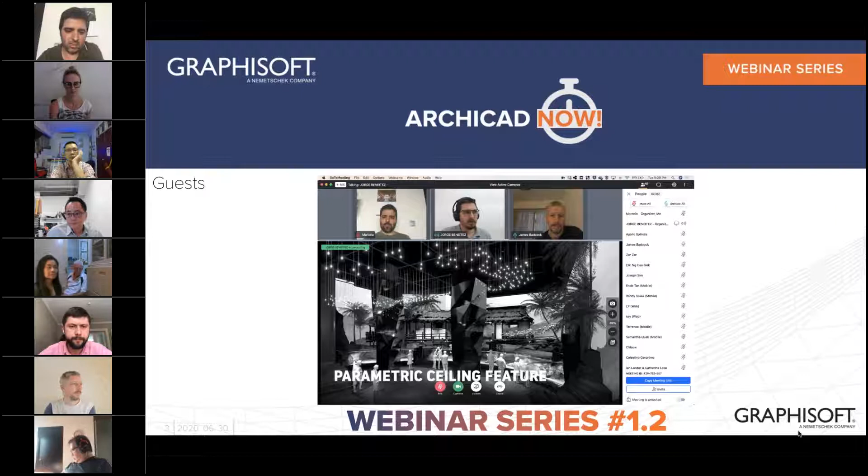Let's jump into this session about building up library objects by importing either native objects that are available online, or external geometry that is also available online. You can get it, and then we manipulate it and enrich it with specifications and properties. So let's jump into ArchiCAD with this.

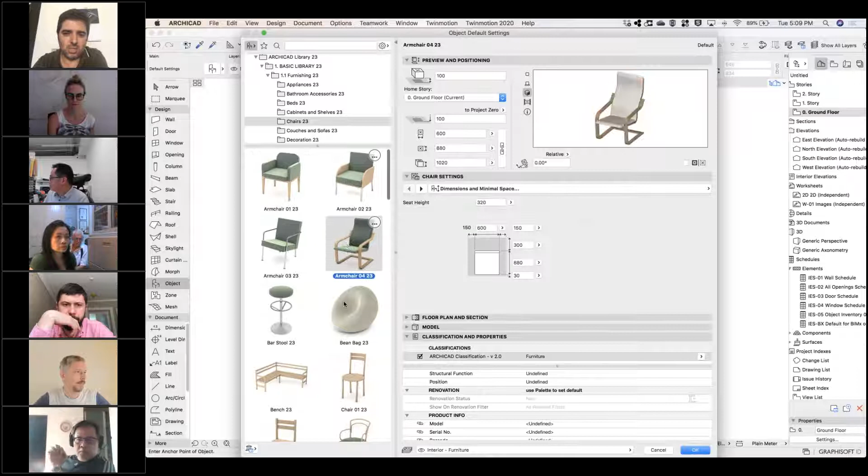So how does this work? Basically, under ArchiCAD, under the objects, we can look for basic library elements of furniture - some beds, some chairs. When we look at the chairs, we can go through some parameters, some properties that it has, and we can even choose different types of designs. So some objects have more properties that we can choose from.

For example, if I choose this designer chair, there are several different designs that we can choose here, and for some of them we can even choose to take out the armrest. These are parametric objects, and they're good because we can very easily turn the parameters on and off here.

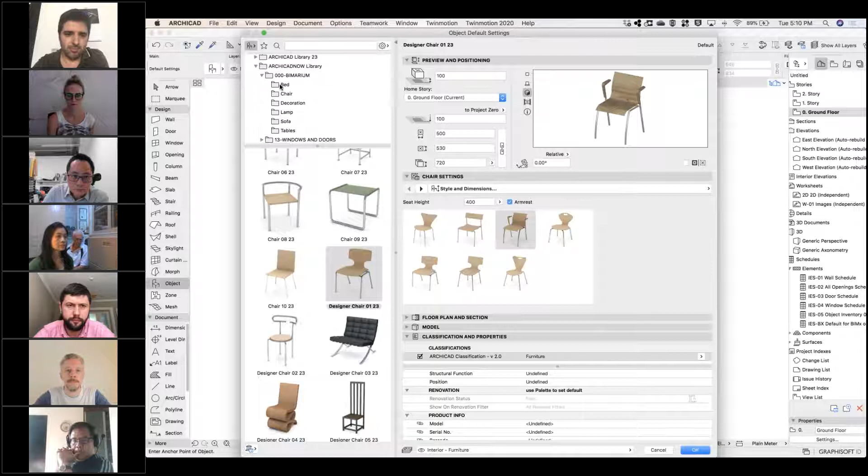Another thing that we can do is load libraries of objects that we get online. In this case, I went to a website called Bimarium and got objects - you see this one, for example, comes from IKEA. We can choose the parameters, we can choose the building material that they have, so there's some level of freedom in terms of choosing properties.

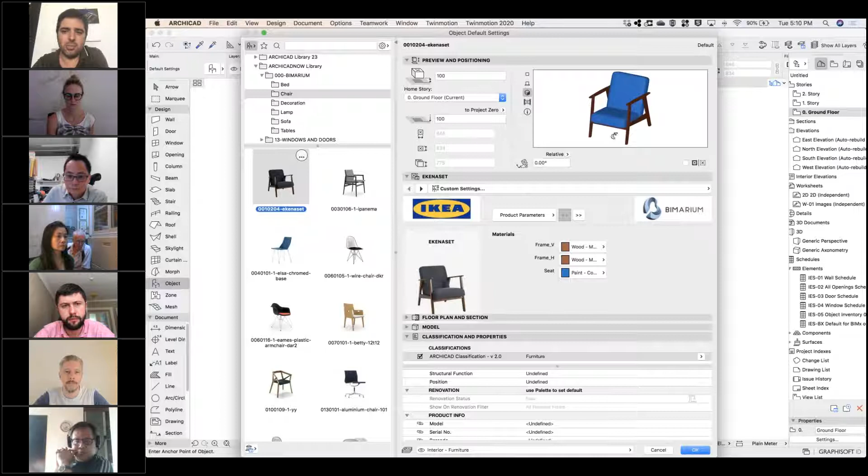Because this is an existing object, it doesn't make sense for us to manipulate the geometry - changing the height, the width, the length. So you see these properties are hard-coded and locked: the chair is 775 millimeters height, and so on.

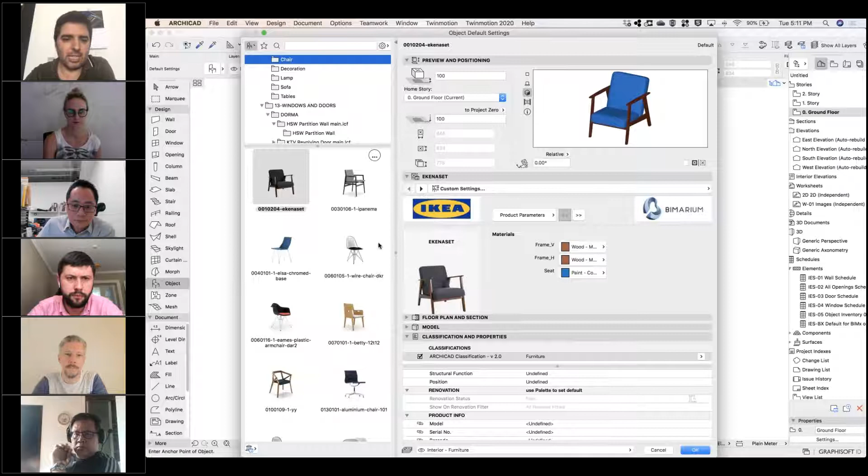This can also be used for other elements like windows and doors. I'll show you where we can get this kind of information. Even if we want to look for material for a certain object - let's say I'm looking for a skylight - I just type skylight here under the search function of the objects, and I can scroll down and see each one, noting that 23 are in my loaded library.

Every other one is from bimcomponents.com - you see it has these 3 dots here, so I can just go to the BIM Components portal. This opens BIM Components, which is powered by Graphisoft. We can go here and download it, drag it into ArchiCAD, and use it directly in ArchiCAD.

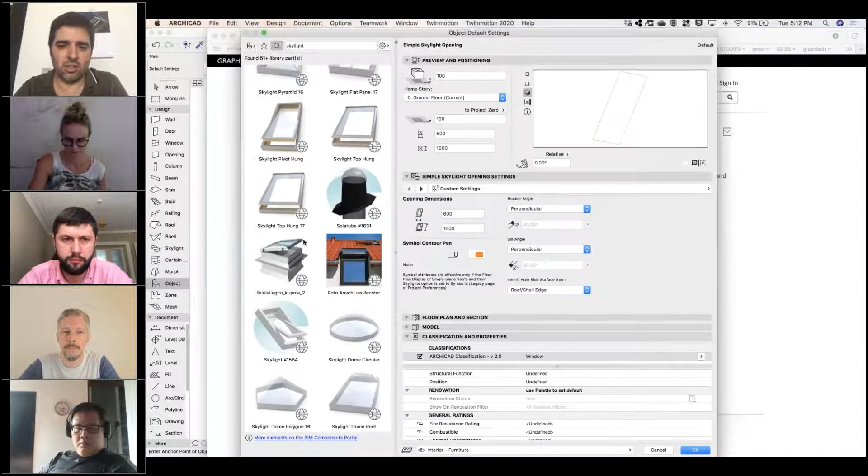But there are other websites where you can gather this information, so this is what I'll show you now. For example, as I mentioned, Bimarium - later on I will have Stefan, who is the founder of Bimarium, explain a little bit about this.

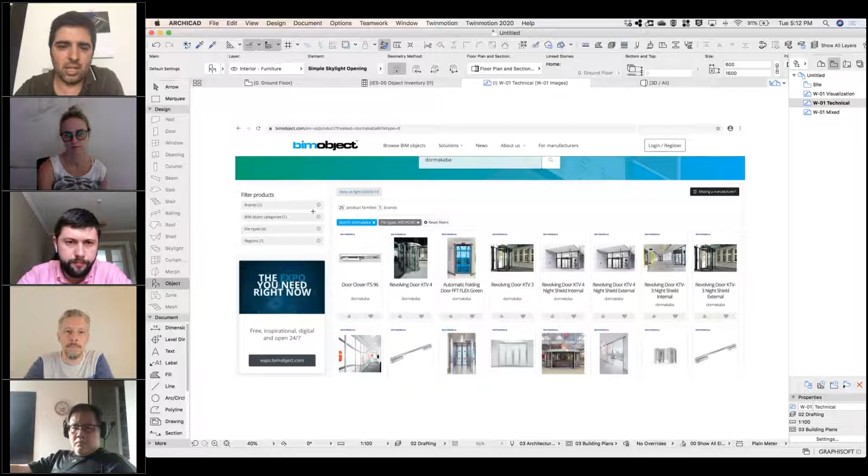We can use bimobject.com, and we can use some geometry websites like 3D Warehouse. We have objects that are more focused in visualization, like this bimarium.com example, and more technical websites like bimobject.com.

So if you want a specific revolving door that you know a certain manufacturer has, for example this Dormakaba revolving door KTV4, you can download and use it in your project. It already comes with the specs and details about the real object.

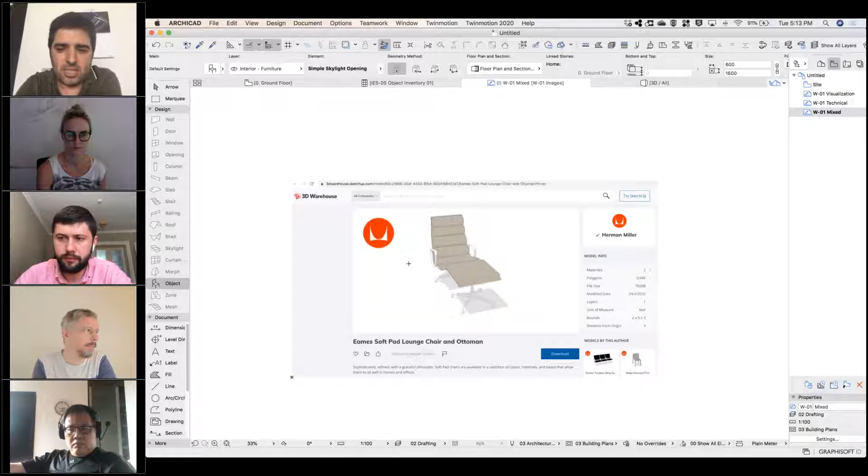But we can end up in a mixed situation where you found a reasonably detailed object that looks like how you want to use it in ArchiCAD. So I went to this 3D Warehouse, this SketchUp warehouse, and I want to download it.

I just Googled SketchUp Eames SoftPad Lounge Chair, and this is where it brought me. I can just sign up and download this object, and then let's see how we can use it.

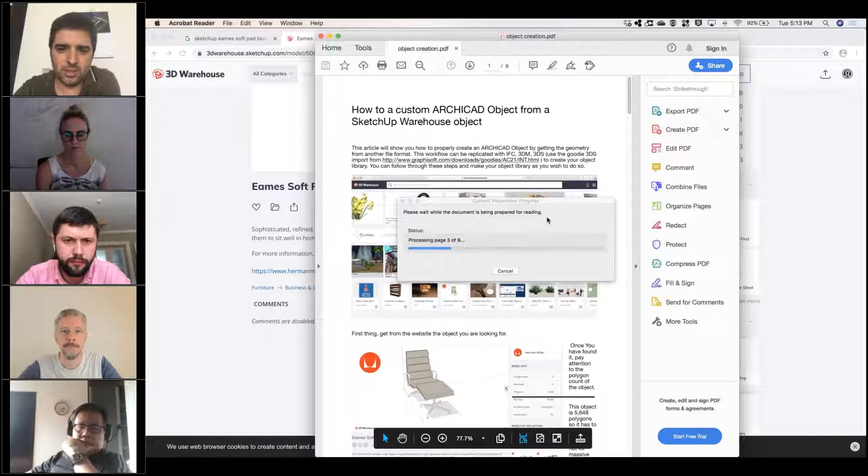So let's dig into this and see how we can do this. Let's say this is my project area, and I already have an object here. So under ArchiCAD now, I already have this Ottoman chair object. I'll just drag and drop it inside ArchiCAD to place this chair.

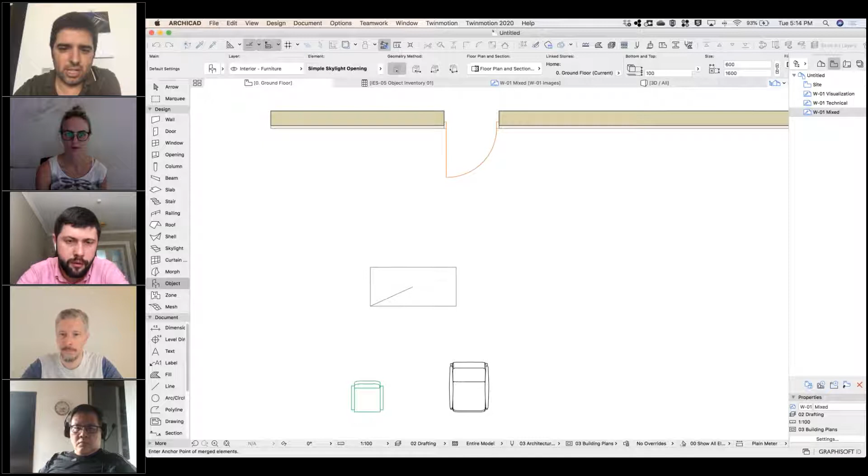And what it does is it starts converting it. You see, okay, the geometry is here. I'll just select it and show it to you. So we have the object placed.

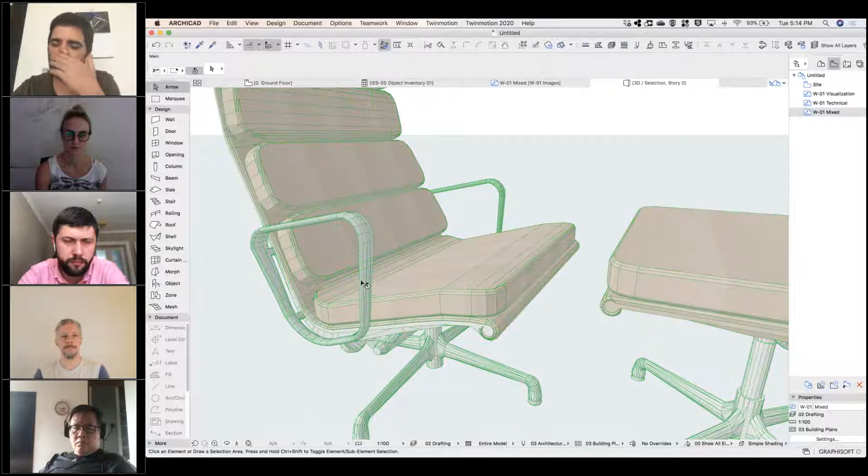It's a bit fussy. You can see that we have all these triangulations that come from the object, so it makes a face out of every face that the element has here, and we can see the ridges here.

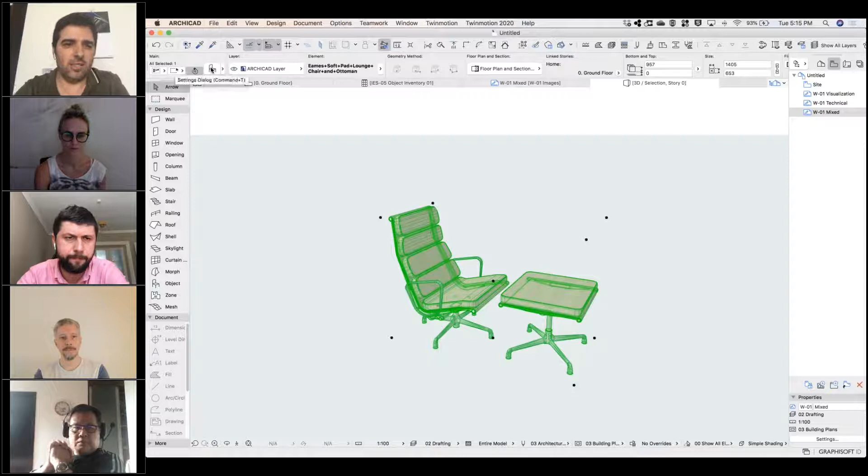So when I select this element here, you can see that it's an object, and I can click and go to the settings and see that this was an object that, just by importing directly into ArchiCAD, it goes into the embedded library.

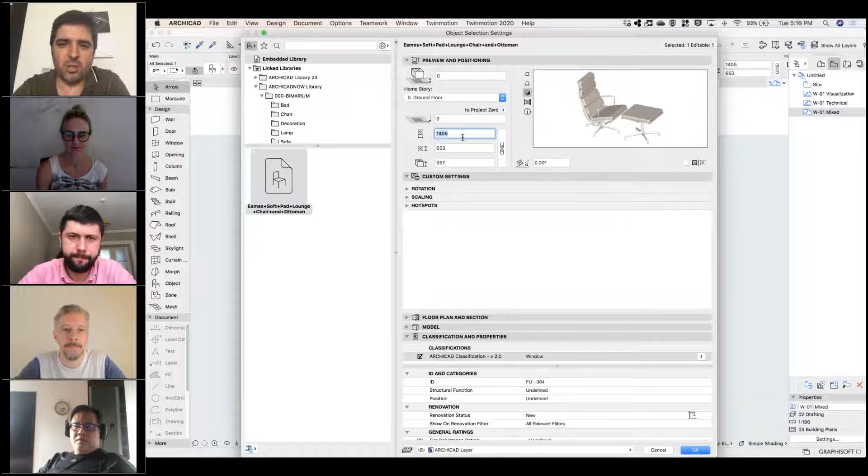We'll have some hotspots that are automatically created in the corners. We can choose to edit the color of the representation in the floor plan of the lines, and we can also override all the materials of the object.

So you see here, it becomes overridden with brick now. So basically, what we can do to make this a more usable object is the following.

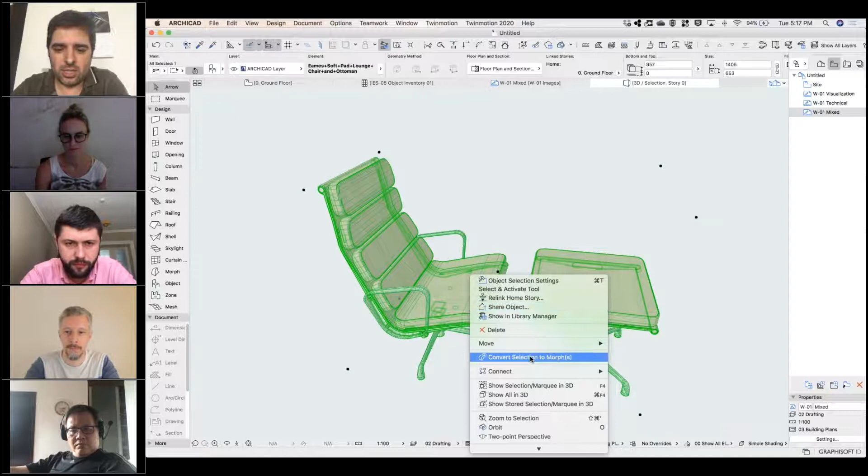First, we're going to select the object and convert it into a morph. By doing this conversion to morph, you will make this object editable, but with editable parts.

So you see here, I have my groups active. Let me see, I think I can move this. Where am I going to put this?

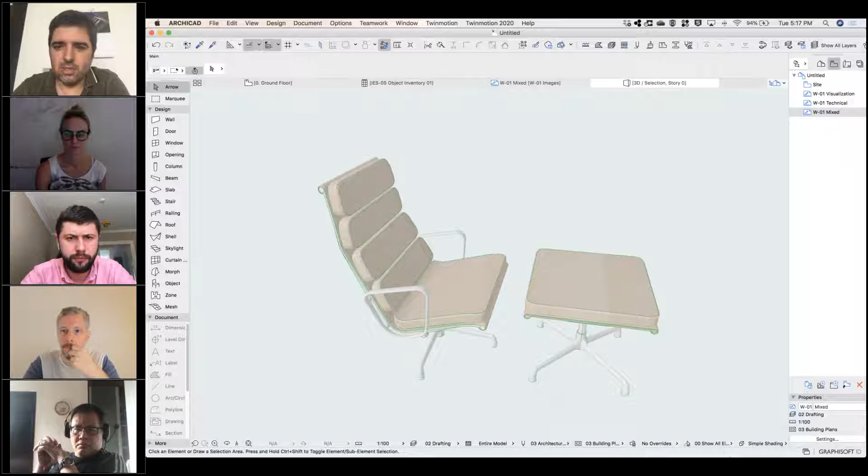Okay, you go here. So if I suspend the groups, I can start—let's say I don't want the armrest, I could have deleted it. Or sometimes I just go under the object and see what is irrelevant. So let's say these elements here, I don't need to have them, so I can just select and delete them.

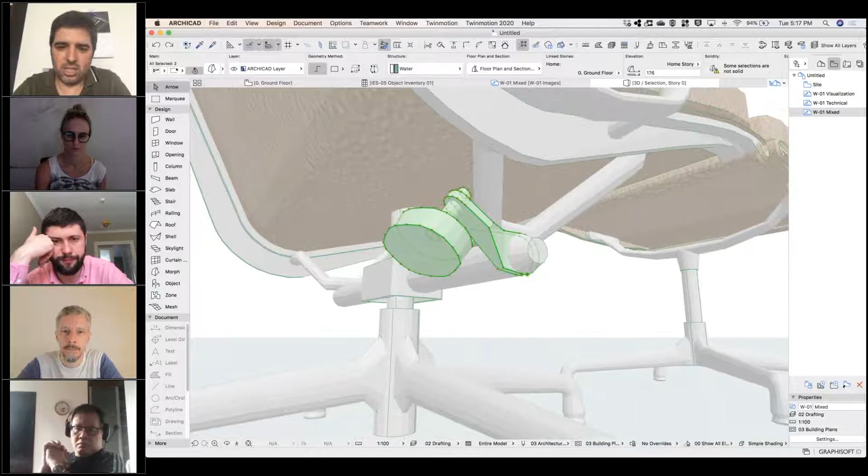And sometimes there are very small, tiny pieces here that we wouldn't want to have. Okay, so let's say I keep it like this. I just took the elevation element from it, and now let's see how this looks in the floor plan.

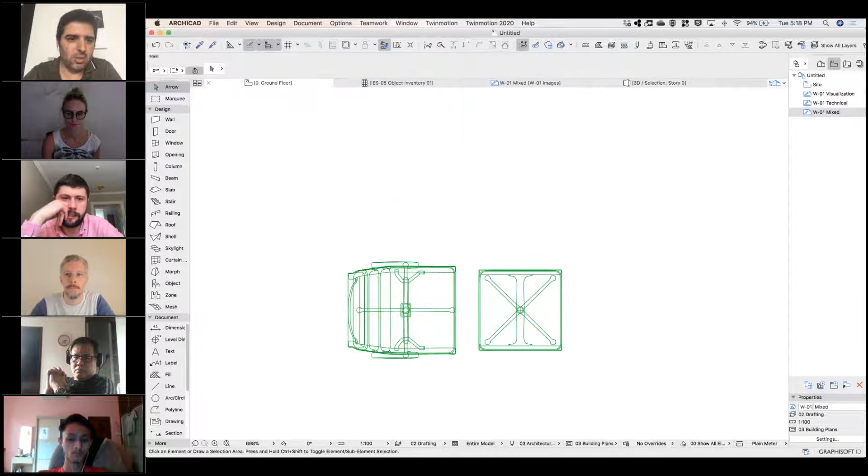So you see, we had the object representation here. Let's see from the embedded library.

So this is how it looks as an object. This is how it looks as a morph. So let's say after I create this as a morph, I could have moved the chair more to the front or less, or delete more things.

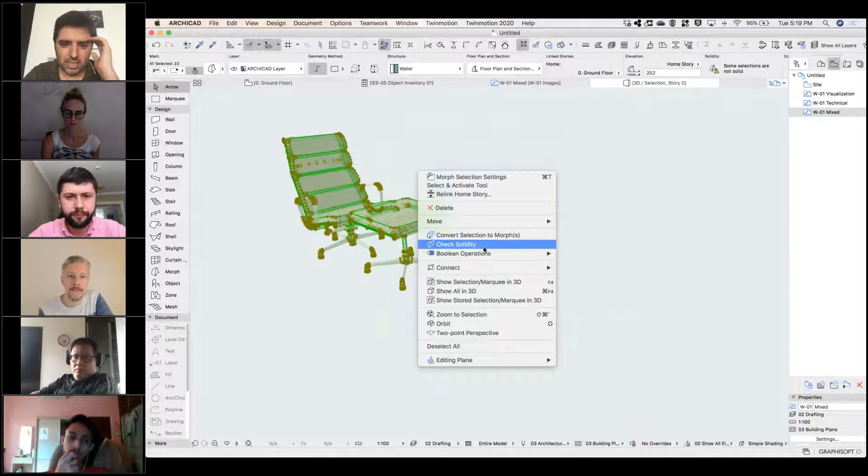One trick we can use is selecting these morphs, and you can right click for the Union Boolean operation. We could merge them, make it union, subtract, or we can even go to the morph settings and check solidity. What I wanted to show is this.

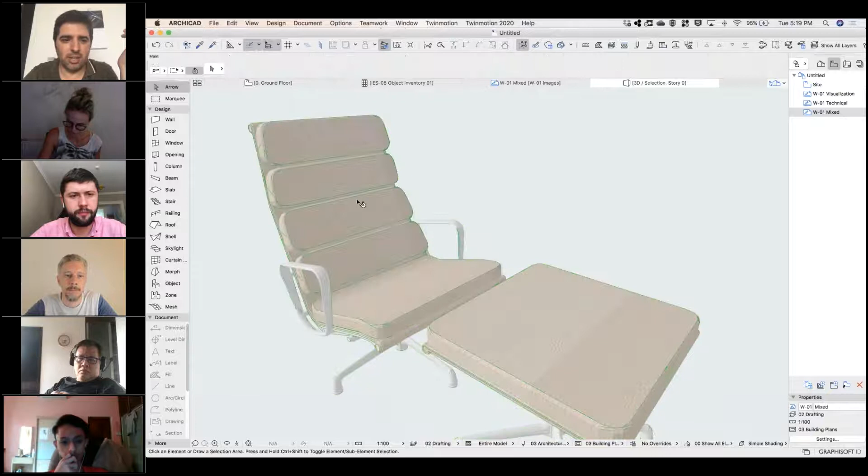So we could go to modify morph, and we can choose to modify the segmentation. Whenever it's possible, I want to have fewer segments, so this will improve the performance of my ArchiCAD. And you look at it, and the geometry is still pretty much intact.

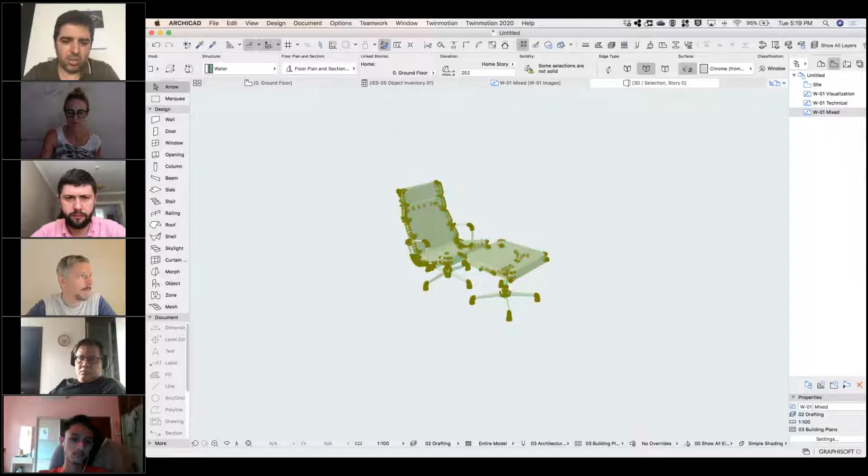We can also choose the type of edge that we want for the morph. So I will put hidden edges, and apply this change to everywhere. Now the morph looks a lot smoother. If we show the two in 3D, the original object or the one that is a morph, probably this one you'll be more pleased with the representation.

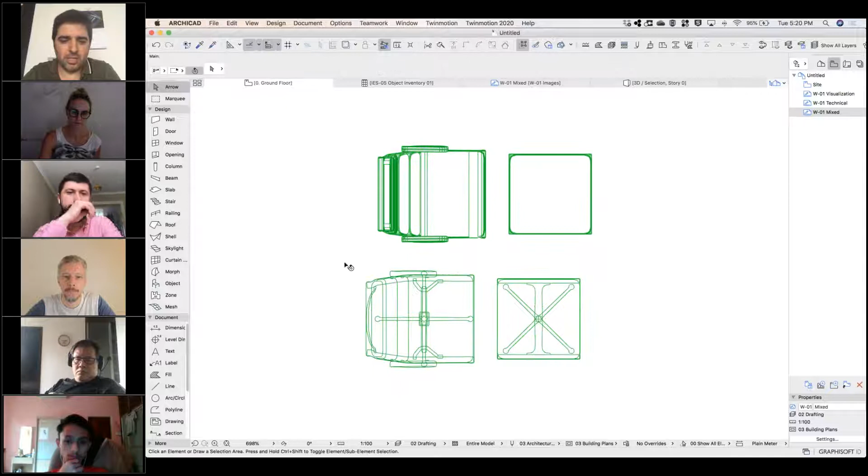So now what else can we do from this? I'm going to save this cleaned up geometry as a new object. I'll just go under File, Libraries and Objects, save the selection as an object, and I will call it Eames pad or soft pad chair.

One thing that we can do is choose the two materials that it has. I always advise to use default materials from ArchiCAD, otherwise you will always be adding attributes to your file. You see here these objects that say from converted objects were the two materials that we brought in from bringing in an external geometry.

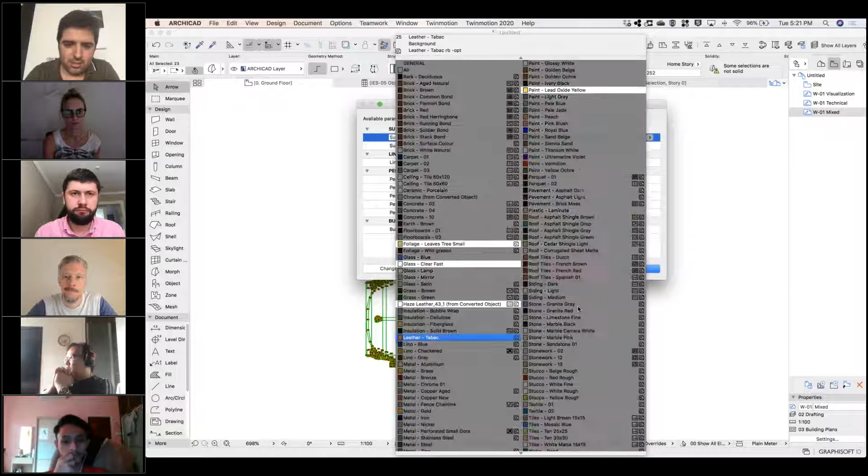So let's say I want leather. Actually, this one should be the chrome. So metal, chrome 1. And this second one will be leather. I have here leather tabac.

We can also choose a building material. I don't want water, it doesn't make much sense, but let's say, I don't know, internal filler. And it's good to rename the setting. Yeah, that's exactly what I was getting.

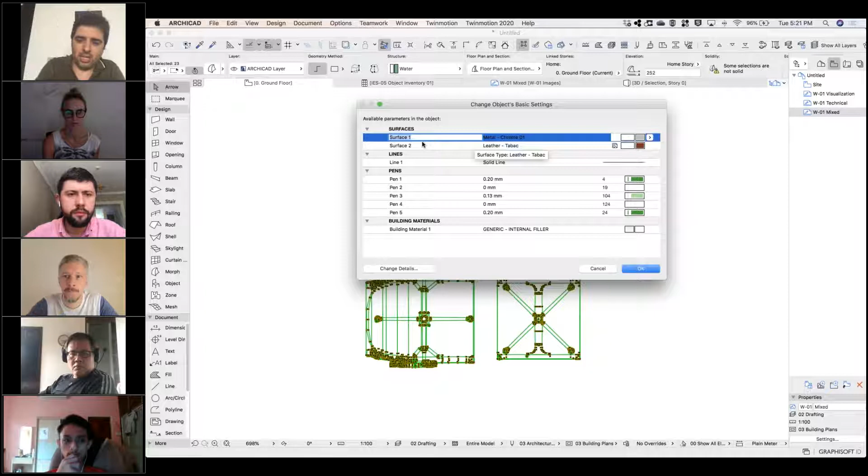Thank you, James. So we can rename this, let's say the legs or metal parts. And this one is the cushion parts.

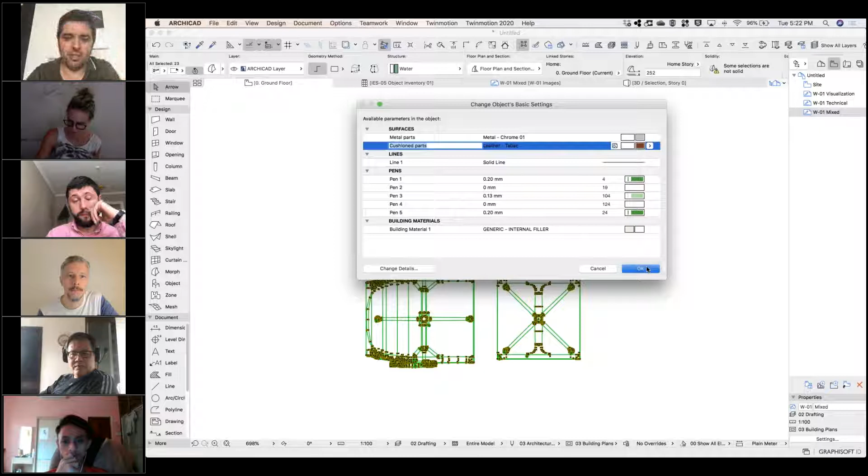So whatever name we add here, we can have it available. Now I save this as an object, and like every object that we just saved, it will be the pre-default object here. You can see that it goes into the embedded library. Then we could go to the embedded library and export it out and save it in a folder that we can then load in.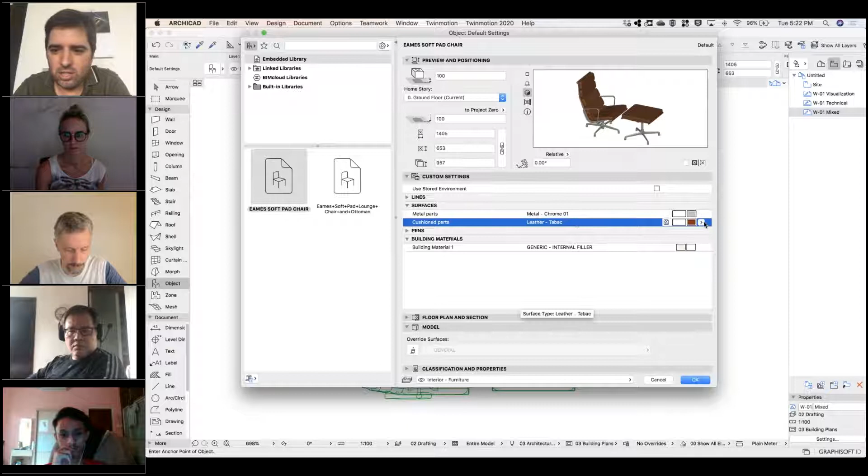You can see that the surfaces come with parameters, metal parts, cushion parts. This is done just by visually saving the object. You can choose the building materials. So if I go and change the cushion parts into another color, it will change directly in the object. So there's still some parameters to it.

Let's say I want this textile here. There's still some parameters to it that we can take advantage of. But still, we have this ugly 2D representation that nobody wants to use. Let's say I had here a 2D representation for the chair that I want to use, right? And this one even has a background fill and then all the lines of the contours of the chair.

So how can I replace one thing with the other? I'll open the object. So I select the object I just created, then I go under Libraries and Objects, open object.

And this will open the interface for this object, where basically we have here the 2D symbol of the object. This is a 2D representation that we can add to the object. This is the 2D vertical representation of the object, like a projection from the top view of the geometry that was created. So you see the bottom of the chair, every element is seen here.

This is not good for us because it's not a good floor plan representation of the object. This one is a section representation of the object. I would say it's fine because it's like if we see the object from the elevation point of view. This is the 3D view of the object, and we have a preview of the object here that we can add.

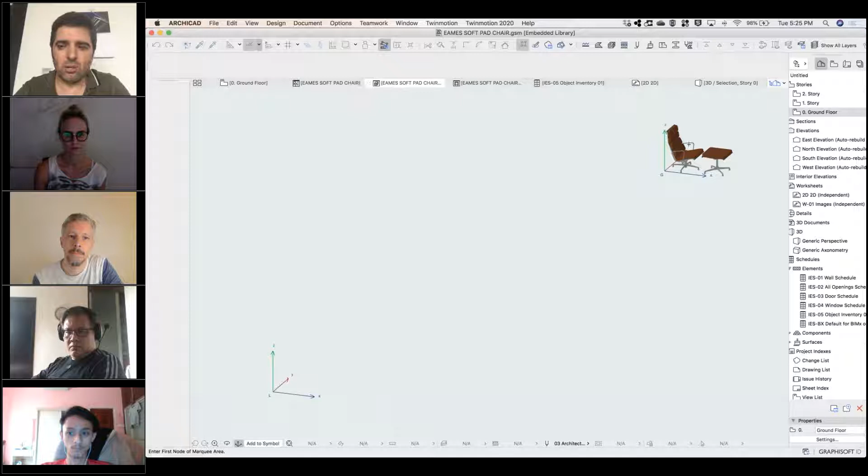If I go to the 2D view, this is the top view of the object. Note that we cannot change this 2D view because it's automatically generated by the vertical projection of the lines of the object. We also have a 3D view that comes from Archicad. As you can see, I didn't place this object near the origin, so it shows me two kinds of UCS here.

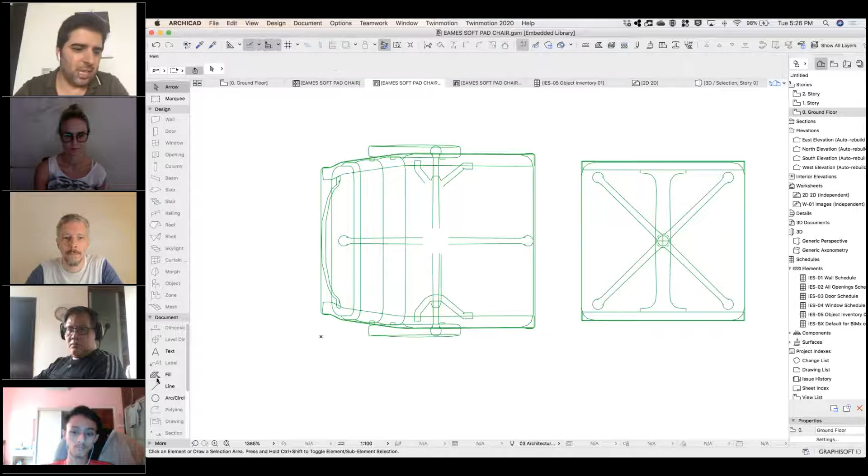So let's get into the 2D view. One thing we can do is a marquee, Control C, then go to the 2D symbol, Control V, and then we have these elements here, and we can start deleting, because these are just lines and fills that we can add to the object. If I create something like this and save it, when I go to my 2D symbol, you see that it's available here now. But still, if I save these settings as an object, the 2D representation will still be the vertical projection.

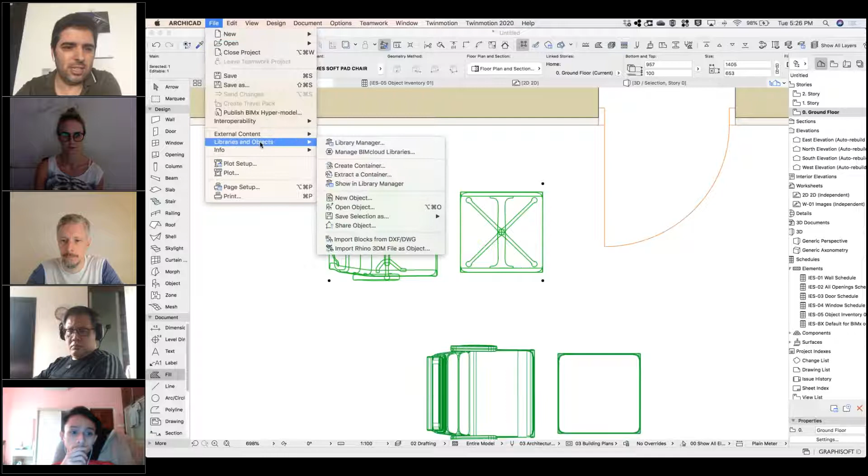So I'll teach you a small trick that you don't need to be a GDL master to understand. I'll open the object and show how we can get rid of this 2D representation and actually choose another 2D representation, the 2D symbol that we have chosen. Let's see how we can do this.

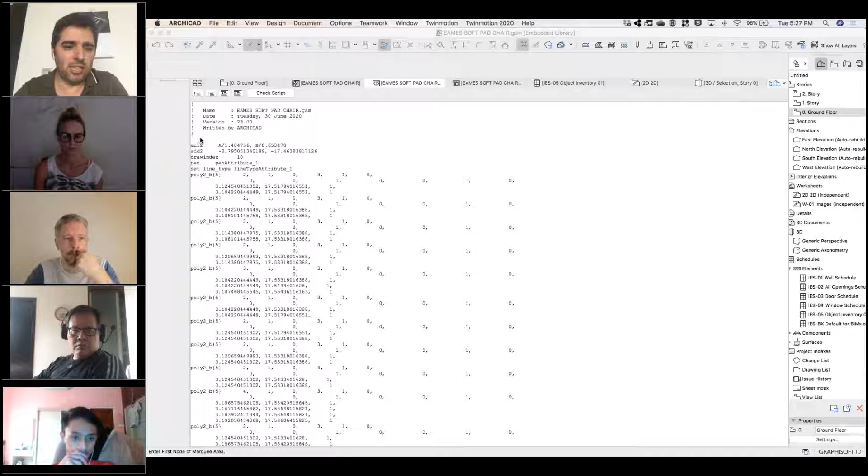So we go under the 2D script, and you see that whenever there's an exclamation mark before, this is commenting the script. What you see here is actually the polylines that are generating the 2D representation of the object. So I will select all, and I choose to comment the whole text.

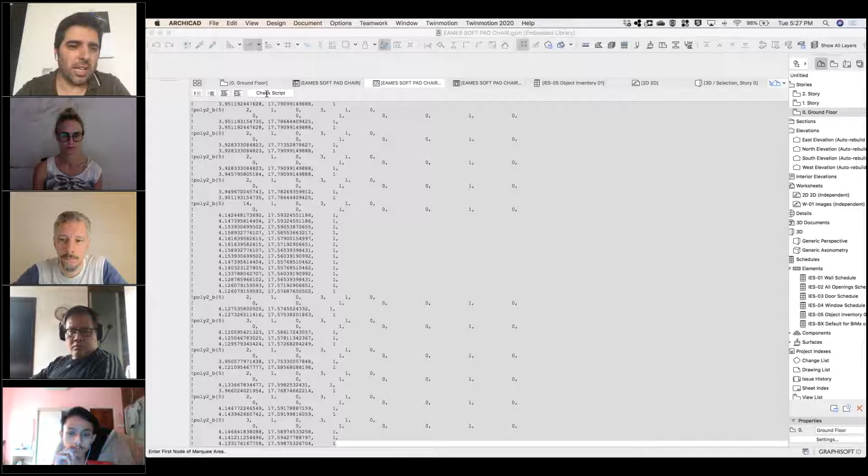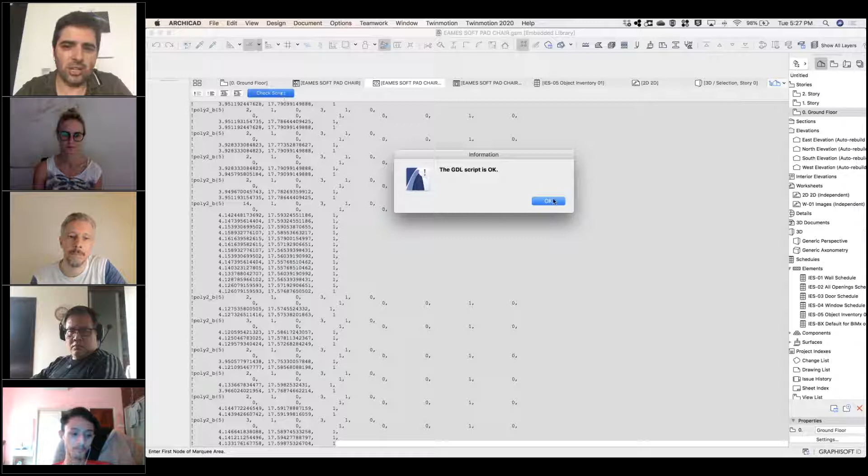So you see now I have the exclamation mark. If I comment the text, what this does is say that this is for review, so we will not use that 2D representation coming from this script. I also like to double check if the script is okay, then I click OK. So I get out from here, and immediately you see that no longer is this 2D view available. Now by default, the 2D view that will be shown is this one.

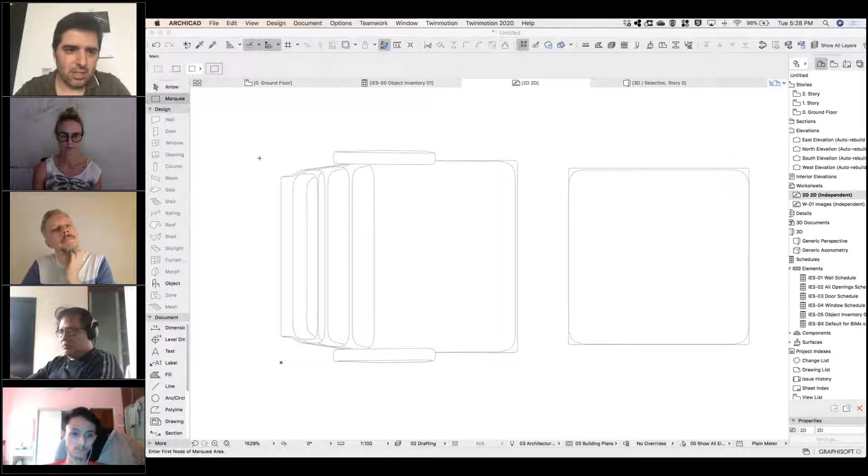Let me get out from here to show you that this is what's happening. So I save. You see now this is what's happening to the chair. But since I have a 2D representation here, I'll just copy it. You see that I have my origin here at the same place as this representation. So then I will go to this object.

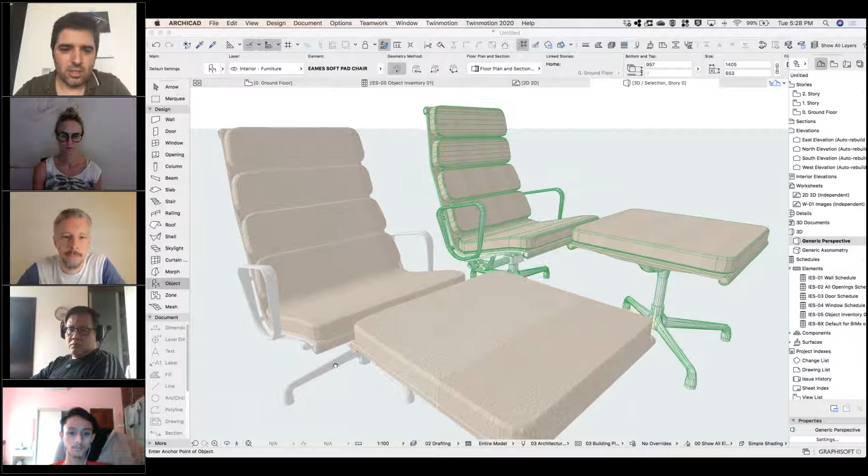Sometimes I have to restart ArchiCAD, so it didn't save this. Let me see, rebuild.

Marcelo, can I just ask one question from Robbie? Yeah. So he said that sometimes when he imports an object from Google or the SketchUp warehouse, the origin point of the object is often messed up. Have you had that experience often, where maybe you have the object and then a point kind of outside of it?

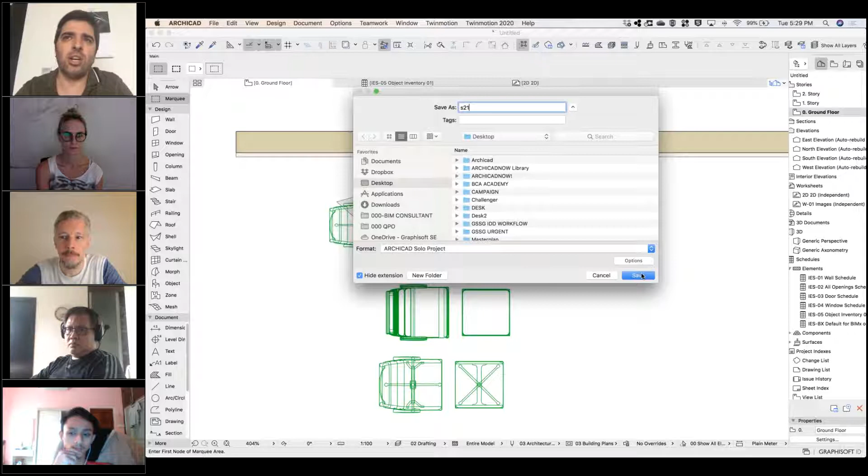So basically, it's how it was saved. It comes from SketchUp, and the insertion point is how it was saved. What I advise to do is either in SketchUp you move it and put it close to the origin, or in ArchiCAD after you convert it into a morph, that no longer is a problem, because it disregards the origin.

So let me close this and open again, because this failed on me. Sometimes it happens that because I'm editing an object, I go in and out a few times, and the selection stops working.

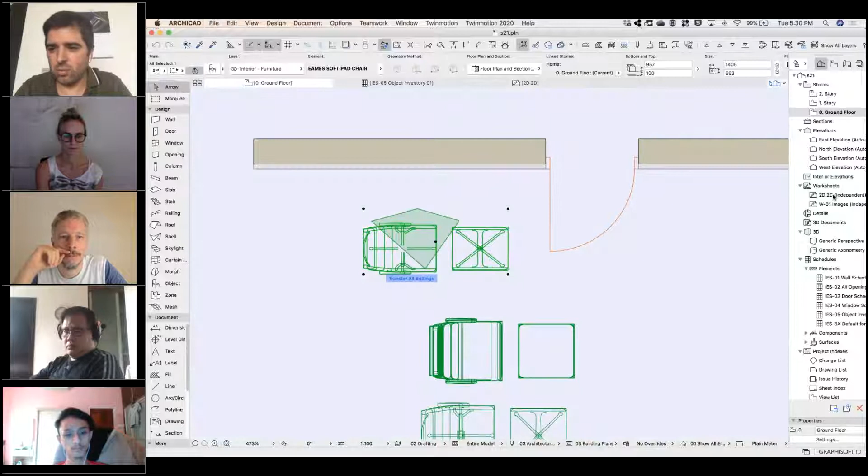I'll just launch it. With the 2D script, I see that you commented it out. Usually I will just delete all that, because I think it's not so often that you'd want that again, and you can always put the projection code back later. It could work as well. But let's say you want to get it back, that's when you would do it like that.

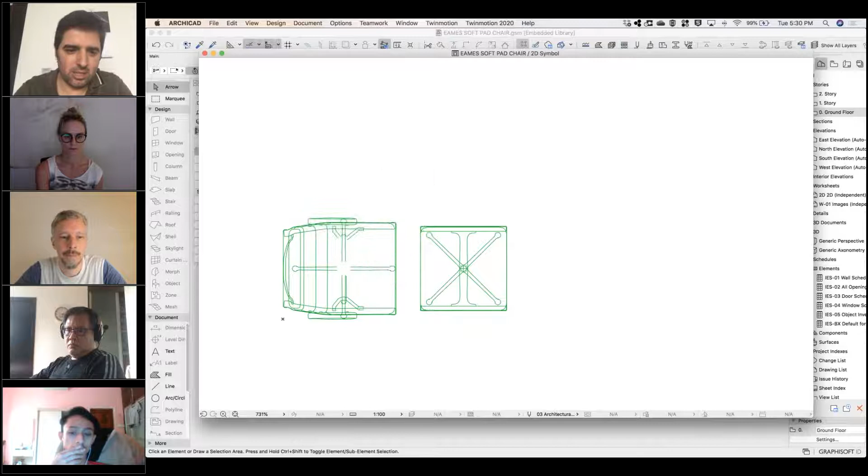Okay, I have the object here. I'll open the object again. You saw that I went to copy those elements, so I'll go here to the 2D symbol. Actually, I don't want this stupid fill, I don't want anything from here. Now we'll just paste this symbol, and you see that it falls in the same place. Basically, I'm using background fill with white background color pen. We can choose to change the color here.

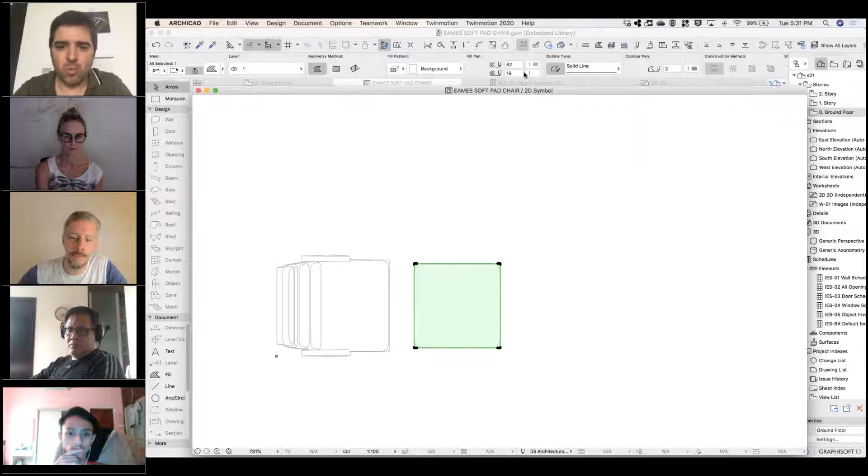One good tip is that the background pen for objects is always pen number 19. I think long-time ArchiCAD users will know this.

I try to simplify this into having the least amount of lines to represent this chair so it doesn't become super heavy. If you want to go even further, you can do that, just delete a few more.

So actually, I think that this fill is not going exactly on the left. Okay, so now I close this.

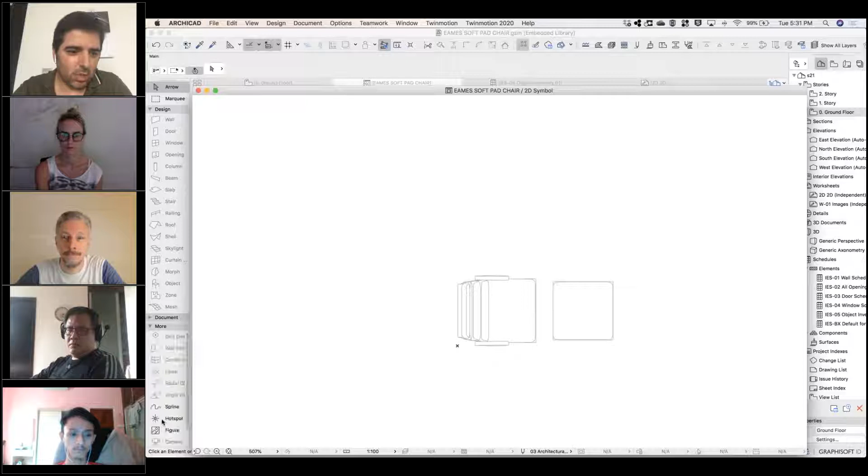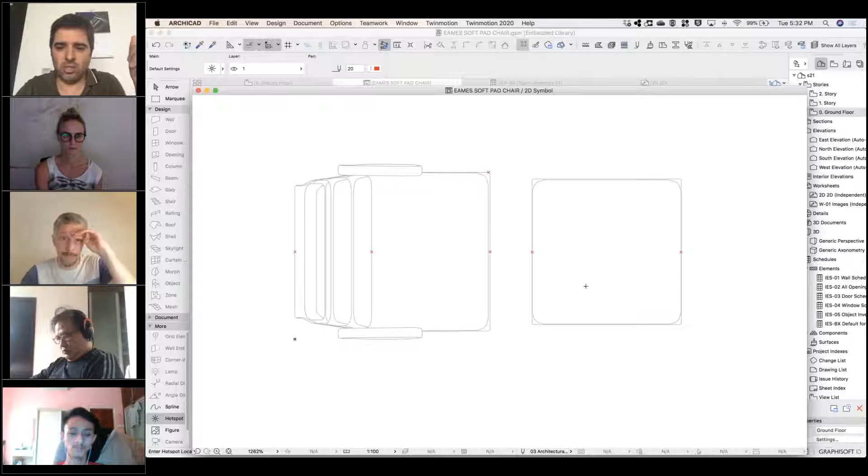One thing we can add, I almost forgot, is hotspots. Hotspots are insertion points we can use for the object. Let's say I want to use the center of the chair, the back, or this corner. By default, it places 4 hotspots at the edges of a surrounding box of the object, and one in the center. But if you want to choose your hotspots to insert, you see I'm adding all these red spots here, and these will be available for me to place it.

So I have now my 2D symbol here. I don't have this view. I have the elevation view, the 3D, and the last one I can add here is the preview picture.

So for this preview picture, I will use an image I got from the internet about this object. Where is it? So it's exactly this one, it looks nice, so I will open this image.

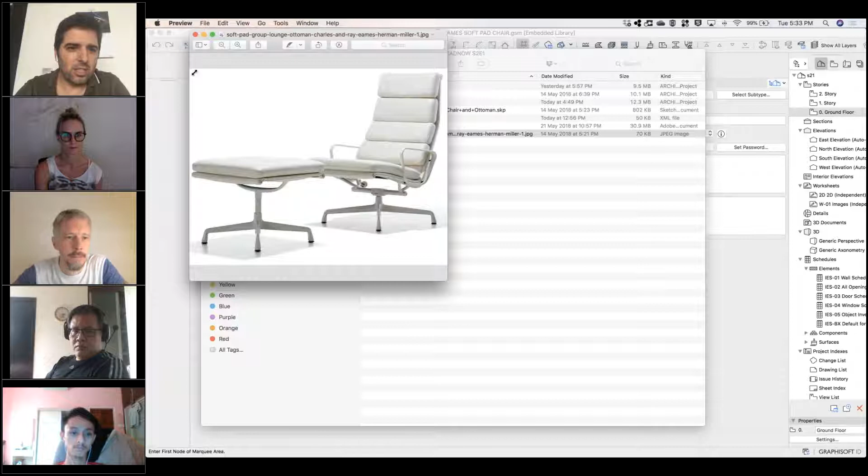I think I can just select all, copy, Control C, and then paste it directly into the preview picture, Control V. So now I've added a good looking photo, even from the catalog from Herman Miller.

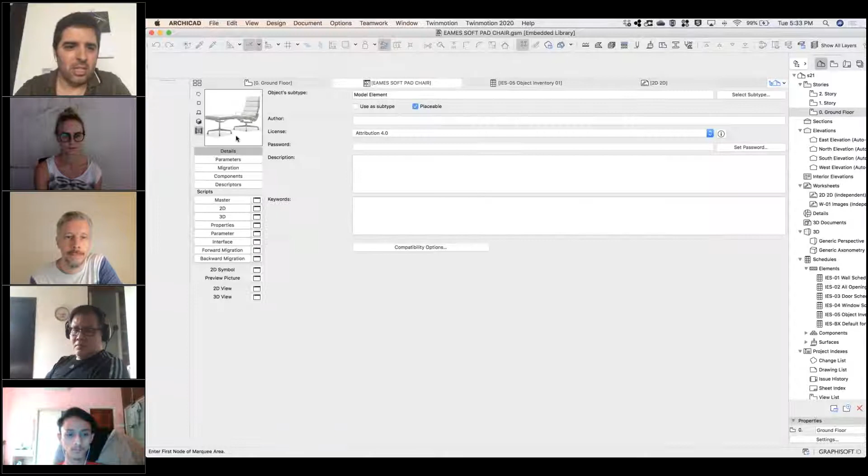So here I have my object prepared. I don't have time today to go into details, but we could go into more parameters here. You can see I have a material attribute metal parts using material number 13, and material attribute cushion parts, material 25. So if you had a typo or want to rename these settings, you can just do it here.

So let's say now I'm happy with my object, this is exactly what I want, so I save it. And now you see the 2D representation is much better. The 3D of the chair is also very nice.

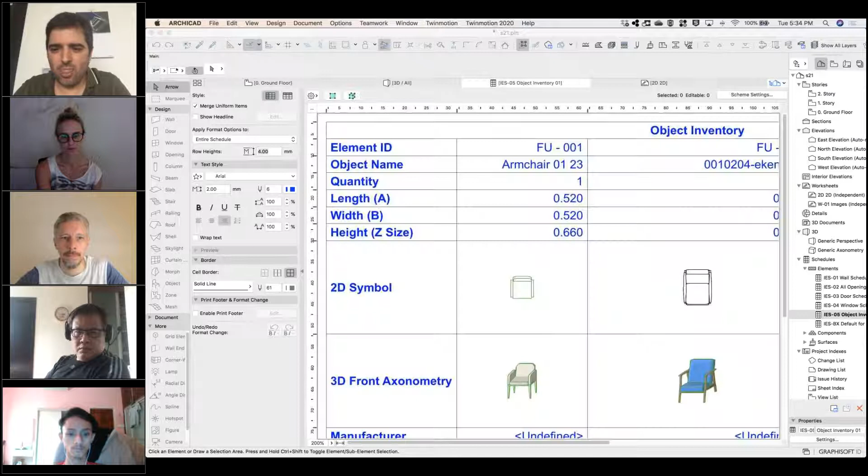Again, I can go to the object inventory, a list of my objects, and I can see the objects I have placed: one ArchiCAD default object, one from Bimarium, the first one I created, and the second one I edited. You can see the quality of the representation is quite nice, the floor plan and all this.

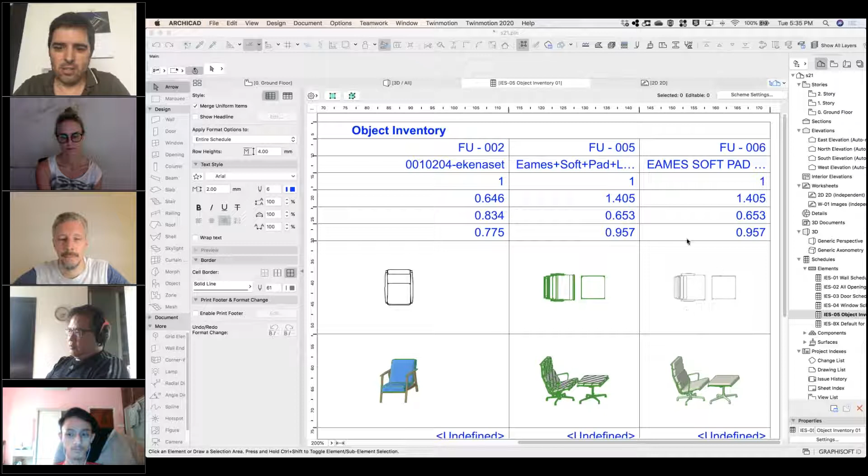So now let's go to the last part of my presentation, which is how can we enrich this with data. As you can see here, I think I have to close ArchiCAD again because of this editing of the objects. Let me open it up.

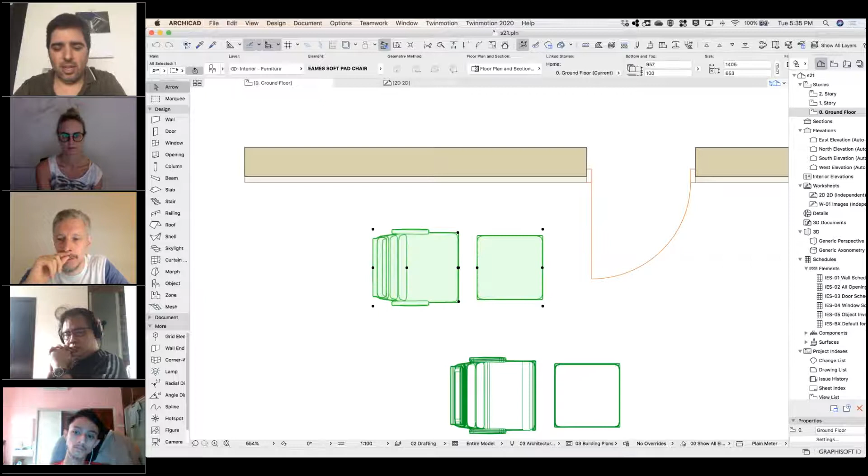In the meantime, I'll ask a question from Zaza, if that's okay. Yes, yes. She asked that when importing the 2D representation in the 2D view, what should be the origin reference base point? She encounters sometimes the 2D shown in the wrong orientation, for example. So I suggested check the 2D view with the 2D symbol.

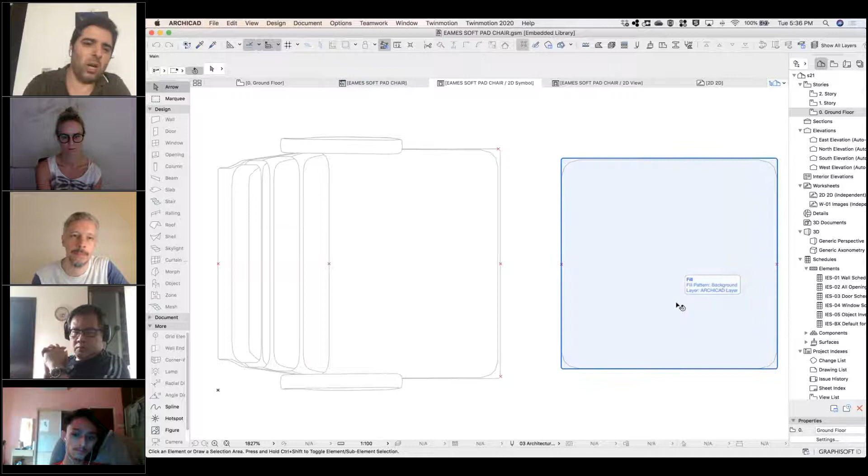Yeah, so that's a very good question. Basically, one thing you should do, Zaza, is like I showed here: first you go to the 2D view, that is the view that comes out from the projection. You copy and paste it into the 2D symbol so you know exactly where the origin is. That's what I've done. Then I copy and paste another one that's more simplified, because you could have a different origin point and end up with a 2D representation that's not the same, so you might have the object here and the 2D symbol a bit to the side. If you follow this process, I have it again in this step-by-step guide, and it shows you that you won't fail with the positioning.

So each one of these objects... sorry.

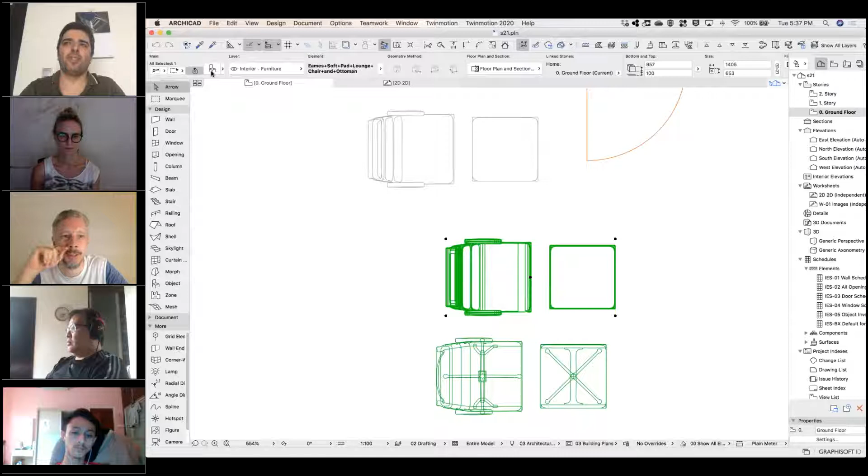If you're interested in a little bit of scripting, I always tend to use the project2 in the 2D scripts, which will always 3D project in the 2D just to check and match the position. But checking the symbol layer first is good, or the view first. Yeah, we could use that also. So it's again going and getting the projection, the vertical projection here, right?

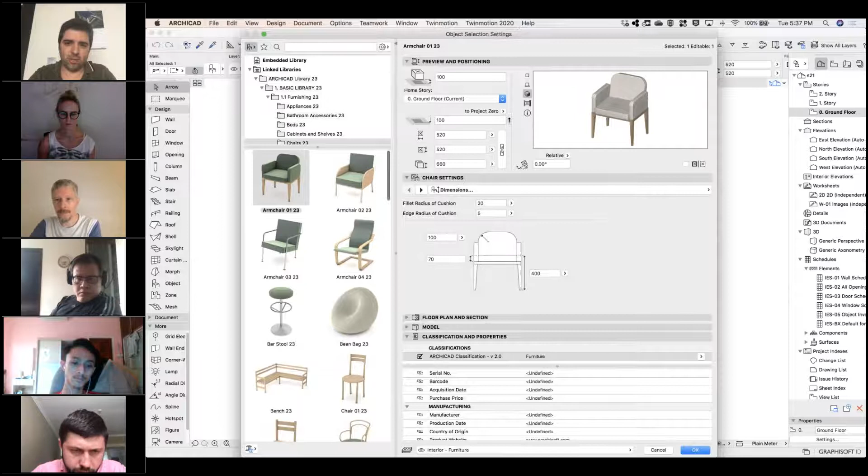One thing I like to highlight here is, let's say we go to these objects - any object inside ArchiCAD, as long as it's classified as a furniture element, you would have the parameters. If it's using the default ArchiCAD template, you'll have parameters like manufacturer, production date, and all these properties. So we can go inside each one of these and enrich it with parameters and metadata, right?

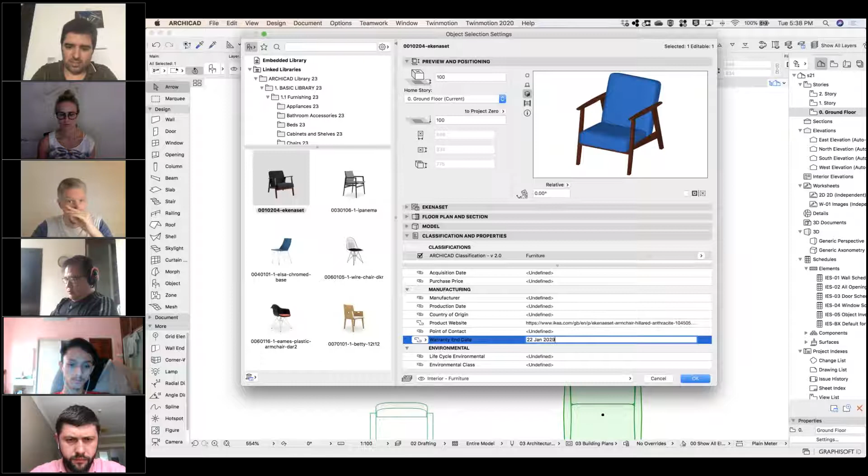So you see this one that I got from BIMobject. I know this is an IKEA product, so I went to the product website and put the link here. And I could put the warranty date, so I could just go inside here and put a custom value myself - let's say 22 January 2020, okay? So whenever we go to this object inventory as a schedule, this metadata - actually I was smart, I chose one property that isn't here.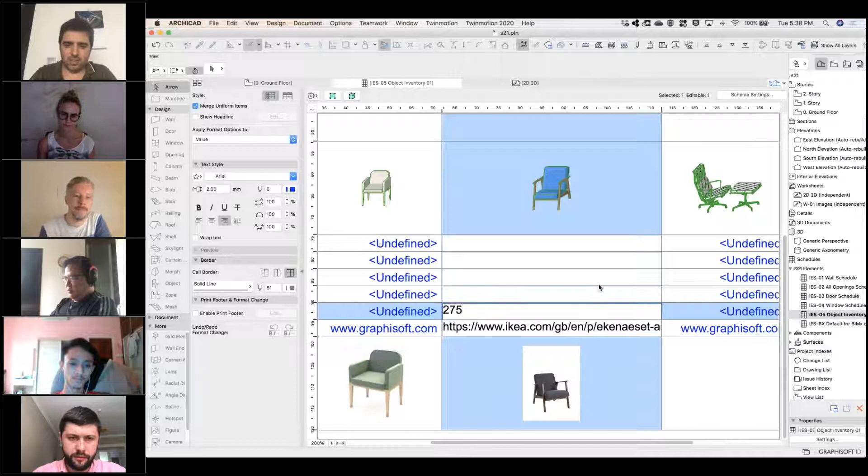But let's say I want to add another thing, let's say the cost, right? I know this one is the cost, let's say I want to put $275. So I just put it here, and then we can have this as a parameter that we could use for a bill of quantities, or we can save it as an Excel file and give it to the client, or even better, once we have this in BIMx, we can tap on the elements and see these properties.

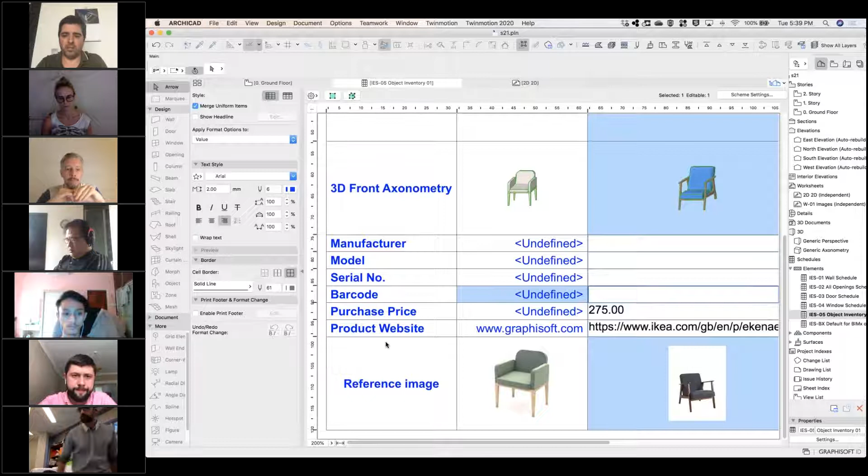So pretty much this is what I had to show here, just highlighting how we can bring geometry and make it look nicer. I think it's very obvious here that one 2D representation looks a lot nicer than the other, and one 3D also looks nicer than the other. You also have the added bonus of being able to put a preview photo so you can show your clients more detail, and enrich it with whatever property you want to put here. So this is the outcome I wanted you to have from here.

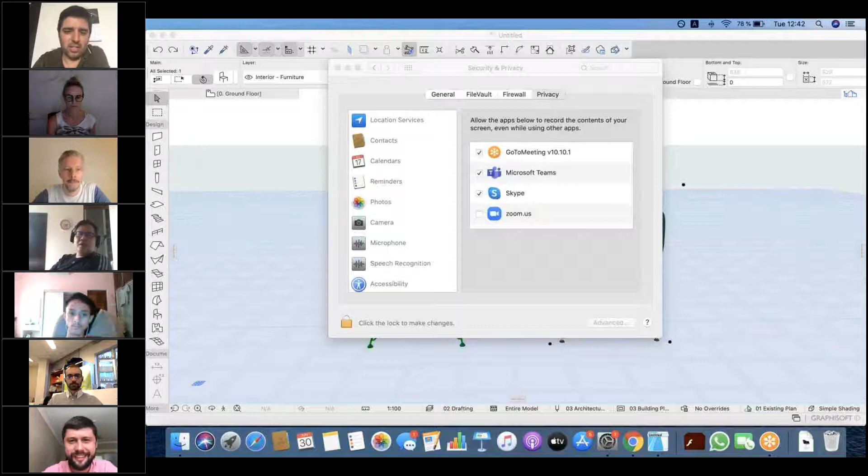So yeah, actually I'm very glad that Marcelo called on me to be with you guys today. I'm gonna explain to you very briefly our website. Basically, the website does everything Marcelo was going to explain to us. So if you guys have the time to do that, it's very good because it offers you a lot of options. But if you don't have the time, maybe one alternative for you can be our models.

We do have free models and premium models, and you can actually go and make an account very simply. You can do that with Facebook or Google, or even by putting your email, and then you just click here on Archicad and you're gonna see all the models that we have. If you need the free ones, you can click the free filter on the left of your screen and get a lot of free models. If you need the paid ones, you can select the paid filter.

You also have a lot of filters on the left. Let's say you want to use an object in the bedroom, you select bedroom and stuff like that. What I want to talk to you about today is some of the differences between the models that we provide and the ones that you can download from, say, 3D Warehouse.

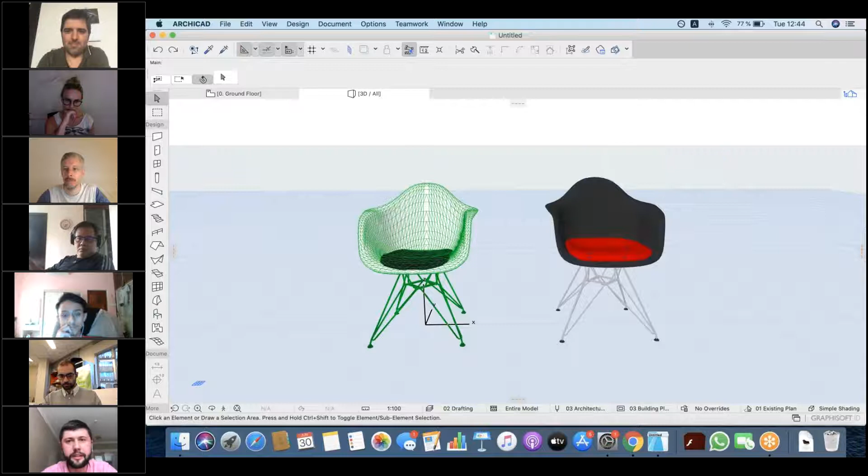So here I have the same model. The one on the left is from 3D Warehouse, and the one on the right is from our website. As Marcelo showed us, if we click properties here, we can change some of the properties really quick, or you could go into GDL scripting and try to change it from there.

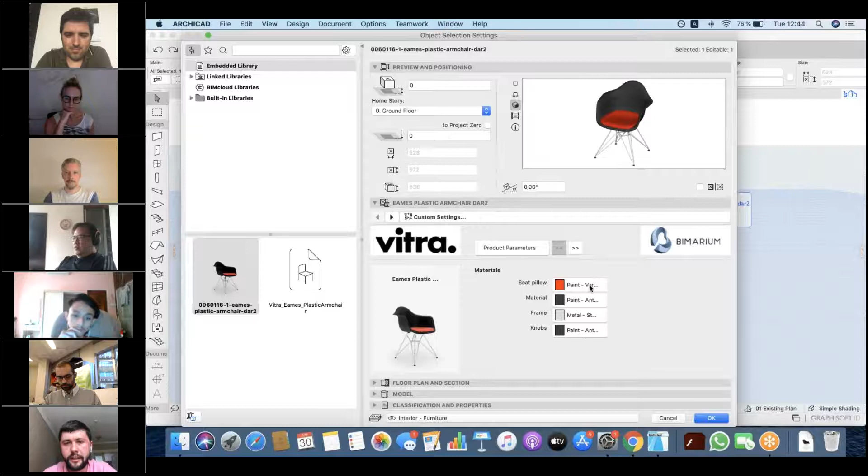But in our model, if you click properties, you can see very simply that you have all the materials. Let's say I want to change the material of the shell. I click the yellow one and it shows in the preview. I can see it, and if I click OK, I can see it here.

Besides this very easy way of changing materials, you also have clean geometry and clean 2D. If you see here, on the left is the imported model, and on the right is our model.

You can also have the preview in Archicad, in the Archicad browser here, and also you can see it in your downloads folder. Here you can see the preview of the model.

I think this helps a lot by speeding up our workflow as architects or designers.

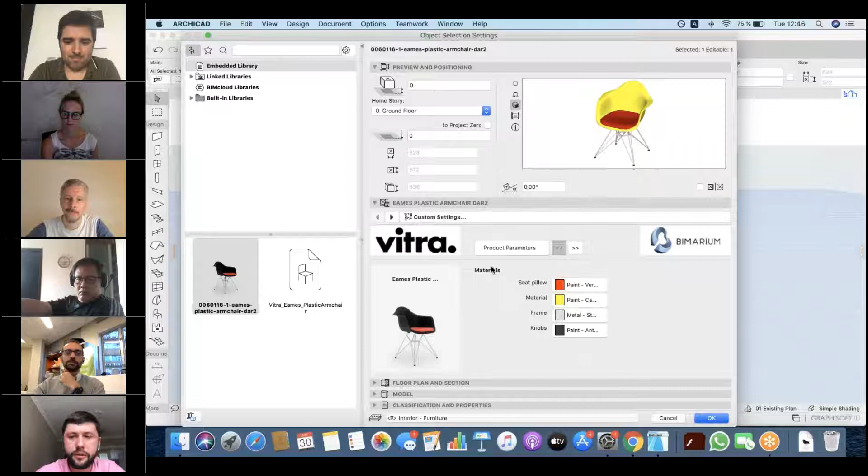Another thing I wanted to say is that our models are not that heavy, so you can put as many of them as you want in your file. So you're not gonna end up with, let's say, 2 gigabytes of an ArchiCAD file. They are not heavy and can be used in large numbers.

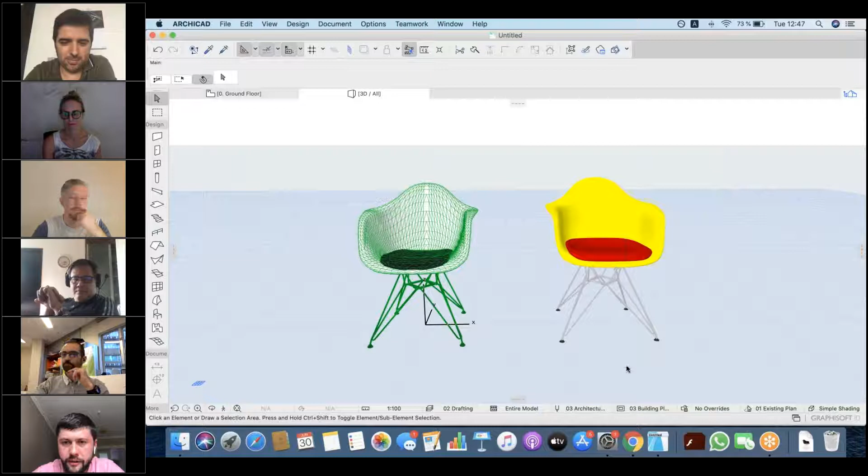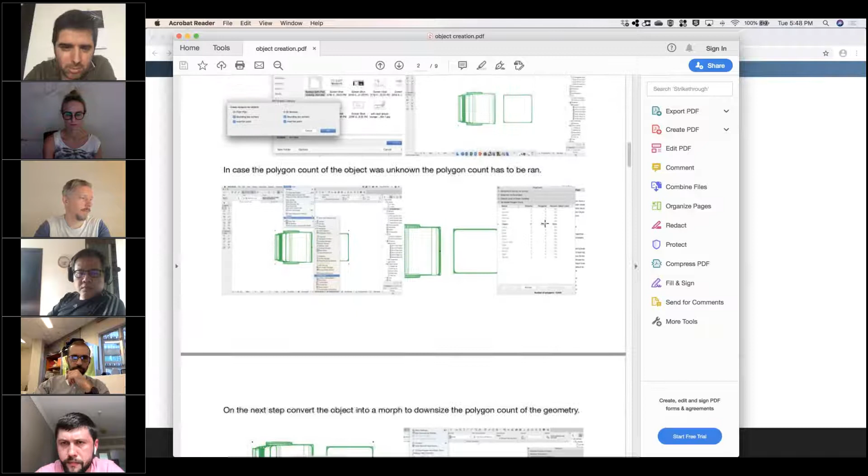Okay, one thing actually I have on the PDF, so Terence, you can see that. One of the things I did here is actually do a polygon count to see how many polygons it has.

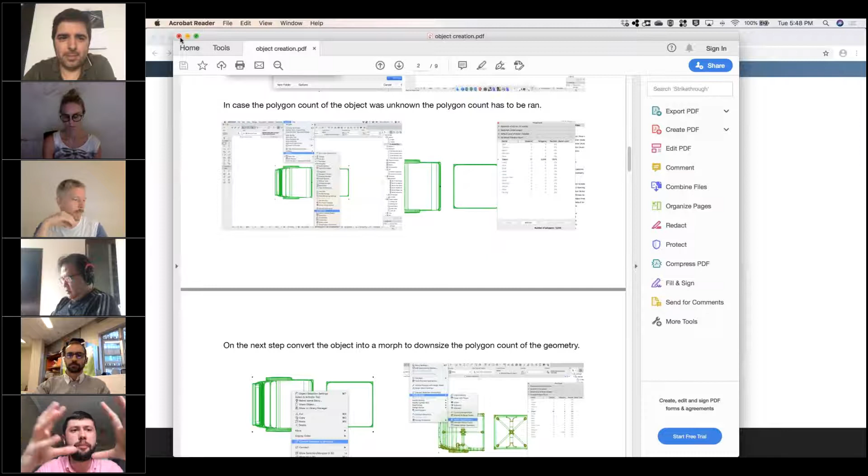Stefan, when you bring the geometry, do you also reduce the polygons, or do you always have that? We don't reduce the geometry, but we build it with fewer polygons from the beginning. Our geometry is symmetrical and has fewer polygons, so it's very good to work with. We don't bring a bigger object and then reduce the polygons—we build the whole model with fewer polygons, and we can make more if we want. But we keep it simple for the user.

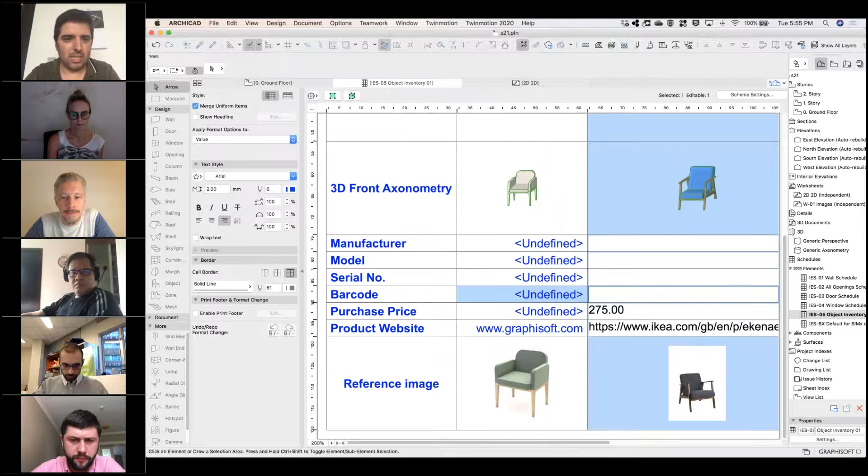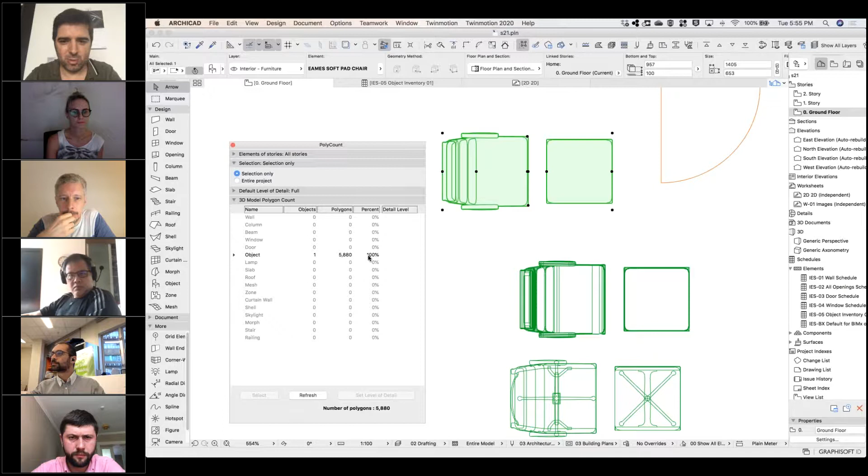So we go on palettes, and if we are in 3D, we can just count the polygons of only one object if we want. So if I choose this one and use the object selection only, refresh, we see that this object has 5,880 polygons. Let's check this other one, I think it's the same — it's even more. So here we see the number of polygons we have.